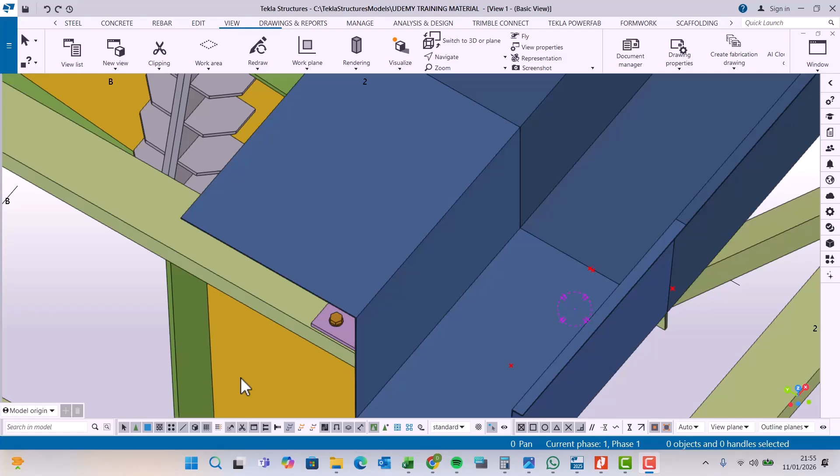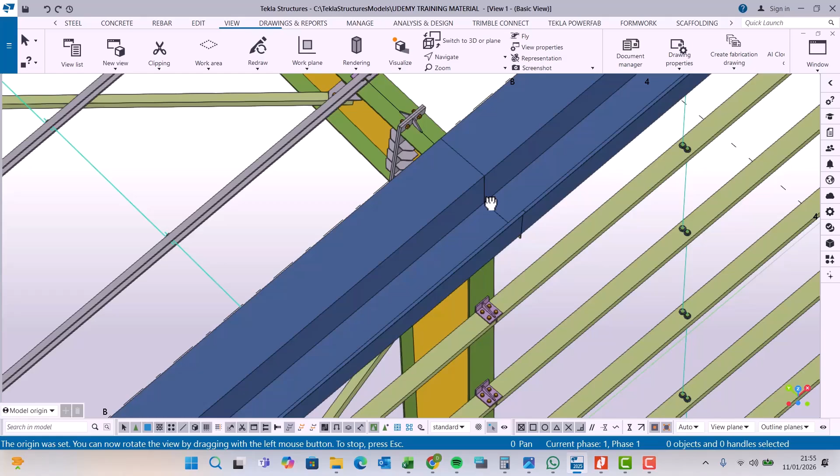Welcome back. I've already placed the points just to assist us in creating the holes on our gutters. You can see we have the points here, here, and a joint on one gutter and a point there. Remember, this joint can be welded on site, or welded on site with some sealing to avoid leakages. There are some numerous connection details we can do here, but I'll cover that in a different course altogether.

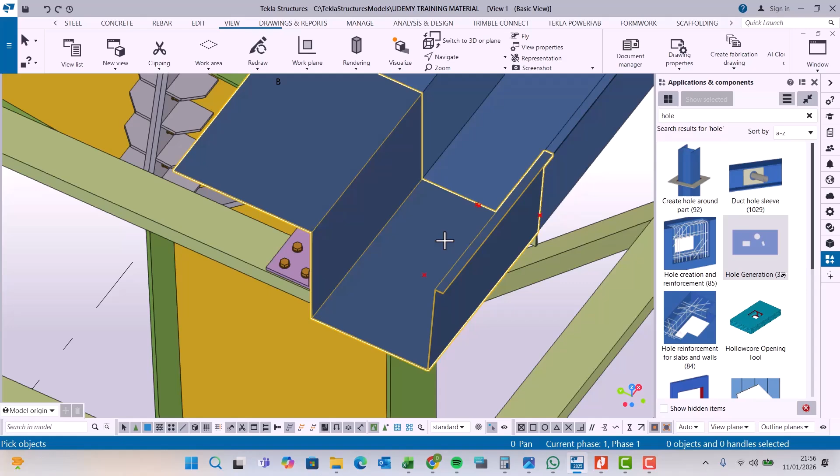Let's go straight and start placing the holes for the spouts. I'll pick on the hole generation, pick on this gutter, press my middle mouse button and place my hole right there. I'll double click on this. So you see the diameter of this hole is 150, once you've placed your point there.

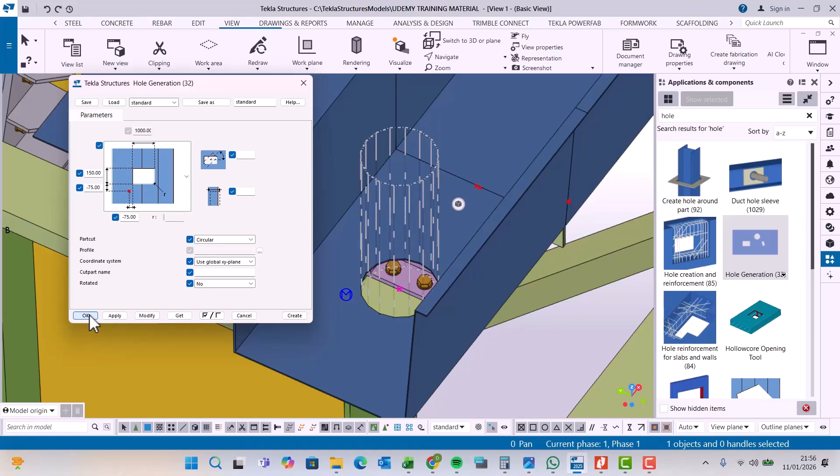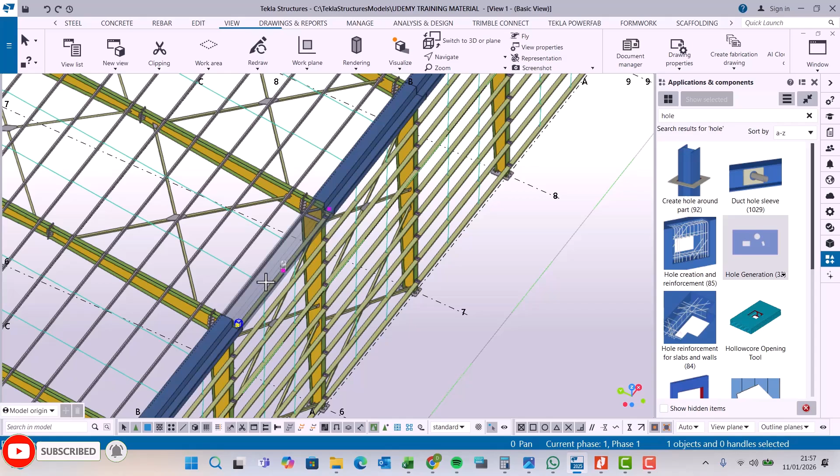Now I'm going to move to the next gutter, select this, pick my middle mouse button, and place a hole there. I'm going to pick this middle button and place a hole right there. Select my middle button and place a hole right there. Press the middle button again and place a hole right there.

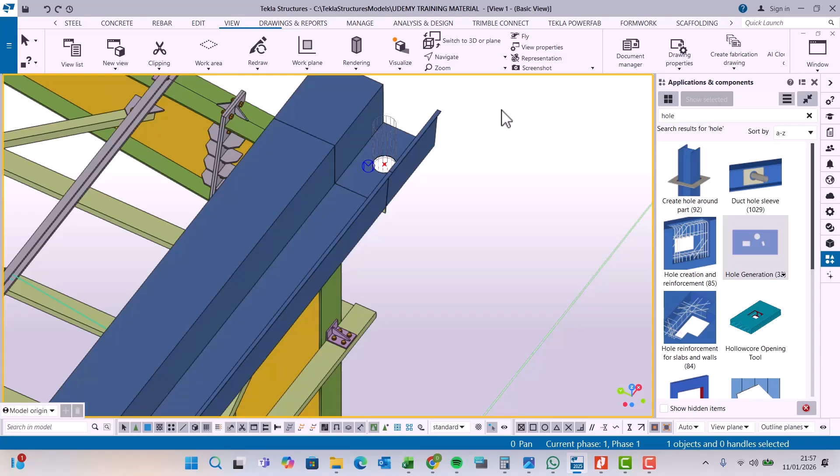And that's it, but you're not finished. Pick on this, press the middle mouse button, and place my hole right there. I'm going to right click and click redraw, then navigate and rotate this. Perfect.

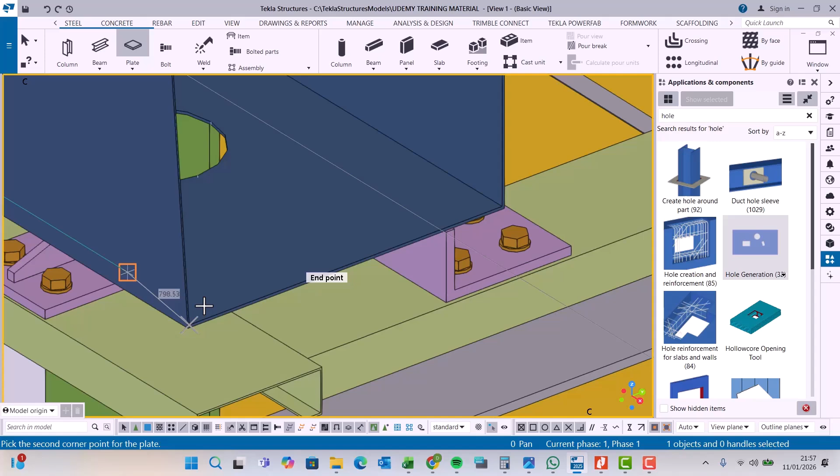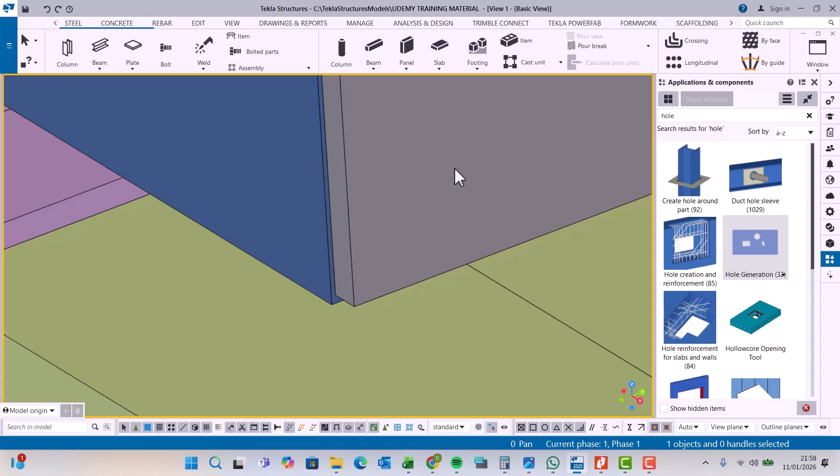Now what we're going to do is close this far end of the gutter. So let's follow the profile of these corners and close it off. Remember, this can be done by welding. Some jobs you can do on site, even though some clients don't want to see any welding machine, grinder, or cutting disc on site. They want to see bolts and steel only. So if you're lucky enough and the client accepts this, you can weld the gutter on site.

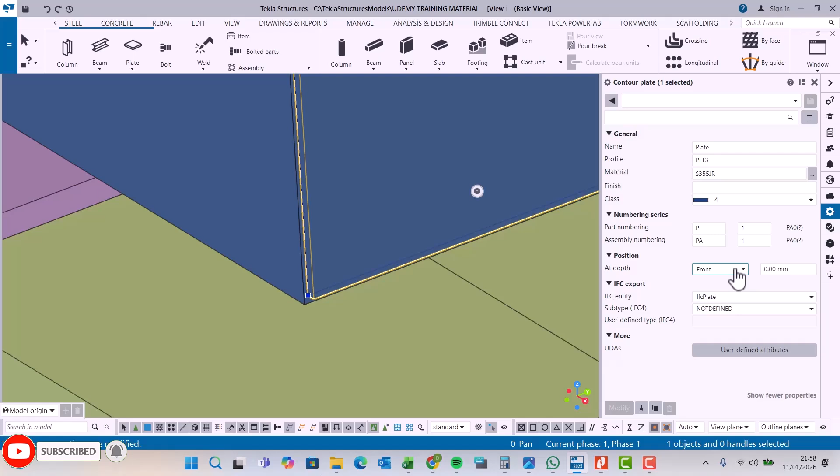Now, the thickness of our gutter is 3mm. We'll change this to 3mm. Let me come here and change that to 3mm, like that, and change this color to that, click on that and slightly push it inward. That's it.

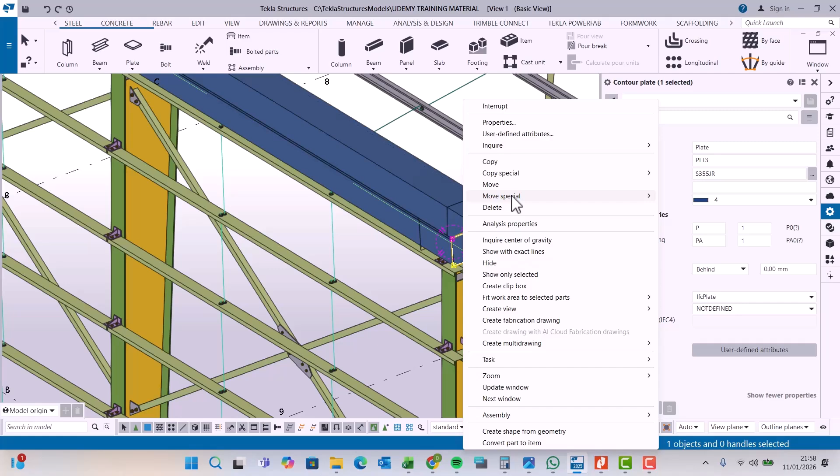I'm going to click on empty screen and come here and pick on weld, so this will be welded to that. Perfect. If I pick this again and maybe mirror it, once I've selected this, I'll come to mirror and pick on mirror. I'm going to use grid line 6 to mirror and click copy. If I go to the other side, I'll be able to see my mirror in place.

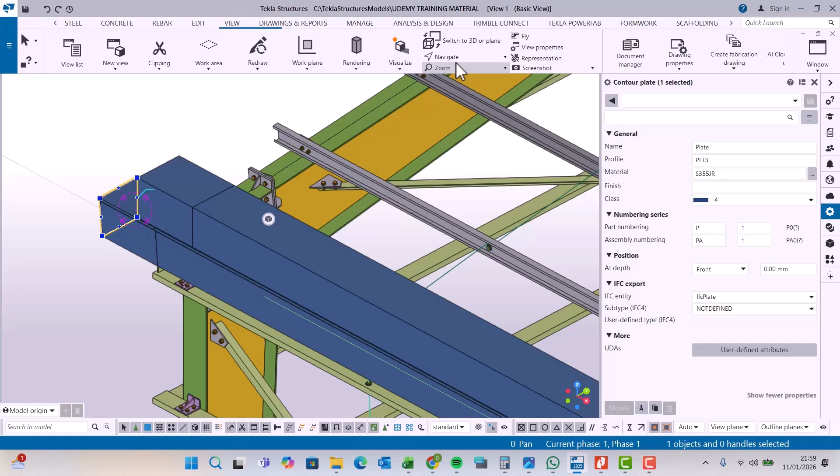This has been copied. So the downpipes, it's easy - you can create that using just the pipe hollow section. Now, if I turn this round like this, by double clicking on empty screen and change this to 0 and this also to 90, and click modify, apply.

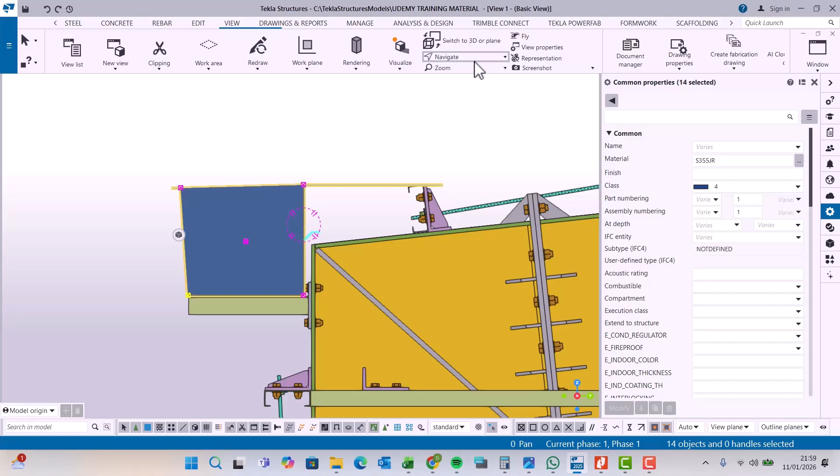I want to copy this. I want to select only this. Once I've selected only that, I'm going to come here and rotate this. Right click and come to interrupt, then come to special copy. Interrupt, remember, is terminating or disconnecting from your previous command.

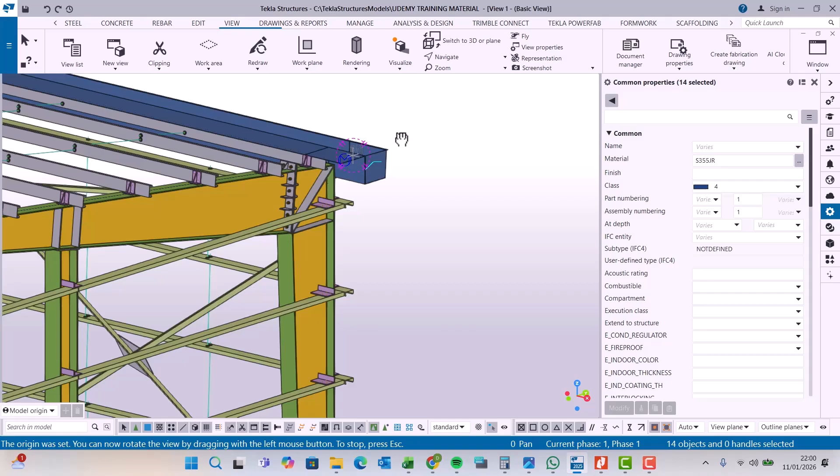So I'm going to click copy and we have the gutter at this far end here. Navigate and rotate, and we have our gutter here. Our gutter is in place, perfectly placed. So we're happy with this. So far, I think you can create something similar to this.

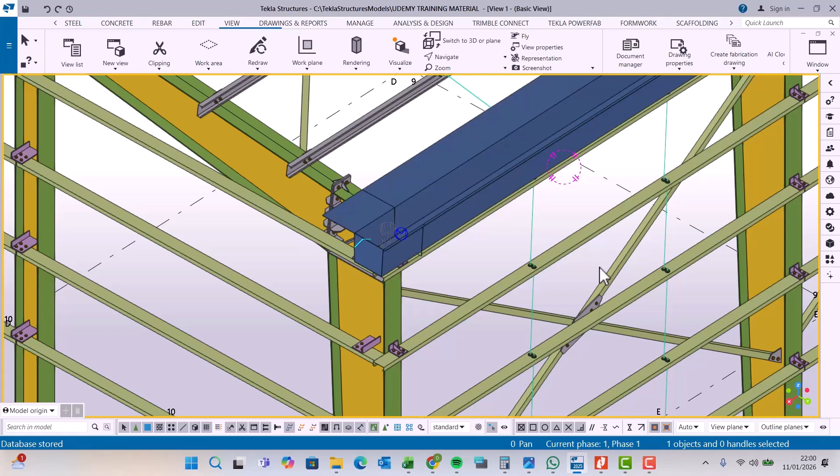Do you mind if we create the downpipes? And what tool can we use? Of course, let's try to use the downpipe tool to create the downpipes. Perfect, do you think we can do that? We don't have time though, but we'll just create it. Let's meet then on the next presentation, the next lesson. I'll show you how we can create the downpipes. Okay, we'll wind up on that spot for the next topic.